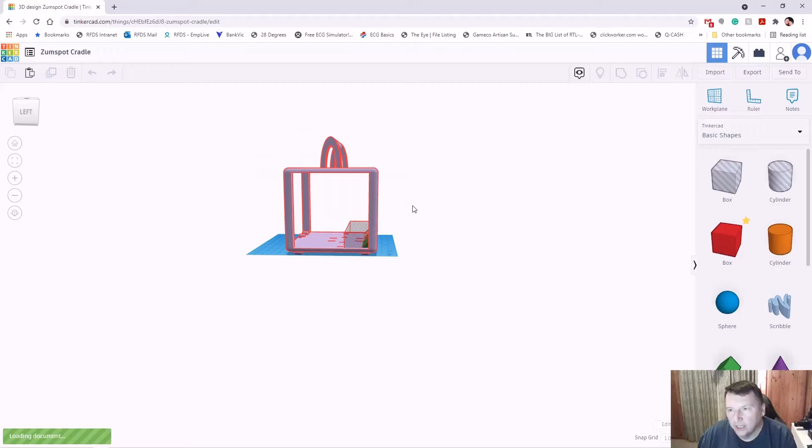So it's simple, very simple operating software. For those that don't know, there's a couple of different steps you have to take when processing a 3D print.

First step is obviously your modelling. You export that as an STL file. That then goes into another piece of software called a slicer.

There's plenty of those around. Creality, which is the brand of printer I use, have their own version of slicer, and there's a few other ones out there. I'm using one at the moment called Cura, which I'm also trialling and getting the hang of. Not sure that I like it 100% yet, but it's certainly getting there.

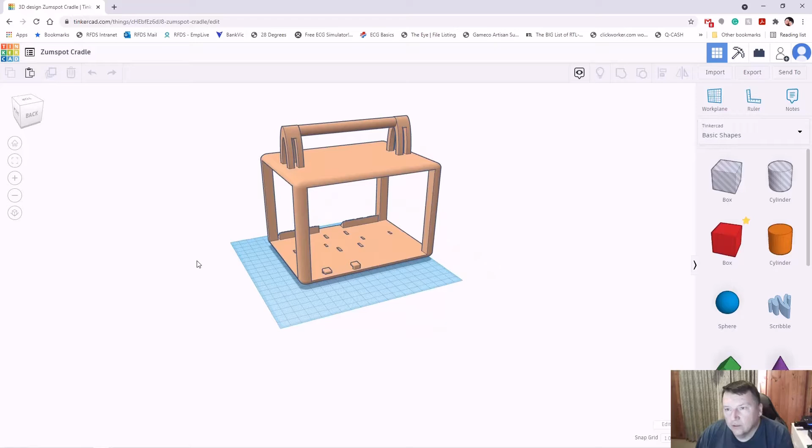So that's our 3D printer, just the general basics of the model. As I said, I'm not going to go through how I built the thing, because it took me probably, I don't know, maybe about 2 hours by the time I finished messing around with it.

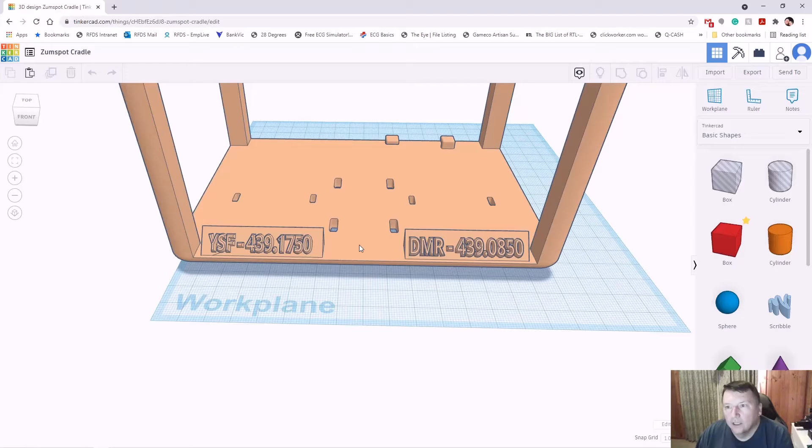And I took the option, just because I could, to get a little bit fancy and model the frequencies and the labels and everything on there. And as you can see, I've got all my slots for cable ties, which is using cable ties to secure the devices at the moment.

We might get a bit fancier in the future. Made a couple of hooks here for the 240 volt power supply cable that goes into the little USB block in the middle, which you might have noticed on the finished product.

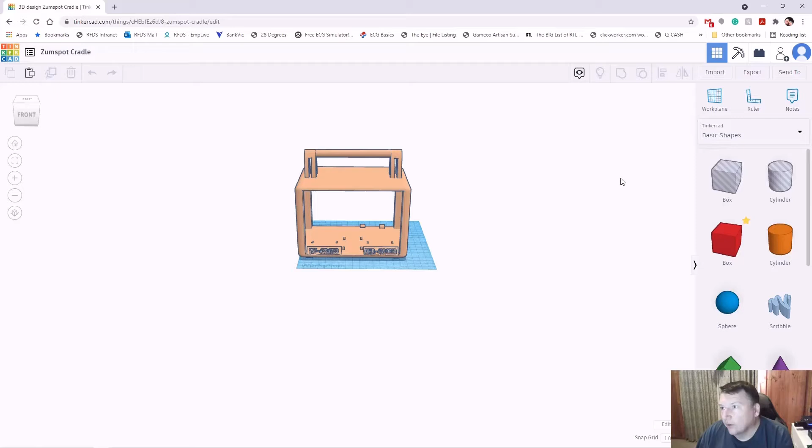So what we normally do is hit export as STL. I'm not going to do that because I've got the STL file already saved. What I do need to do though, I need to go into the file and load it.

I need to load the STL into the slicing software, which is here. So as you see, we've got two files here. We've got a G-code file, which is the file you actually put into the 3D printer, for those that don't know, and this is the STL file.

So what we'd normally do is open the STL file. Cura will automatically open for me, as that's the one I've been favouring at the moment.

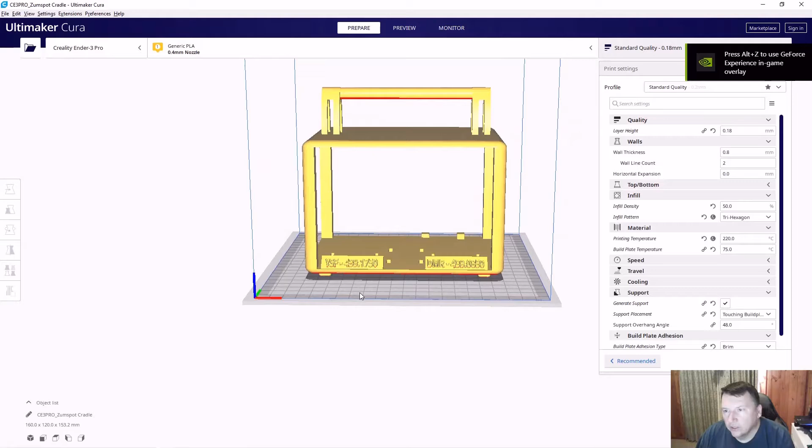And once you're in, it basically gives you your file. You zoom out to a 360-degree view of everything. Over the side here, there's a huge amount of parameters.

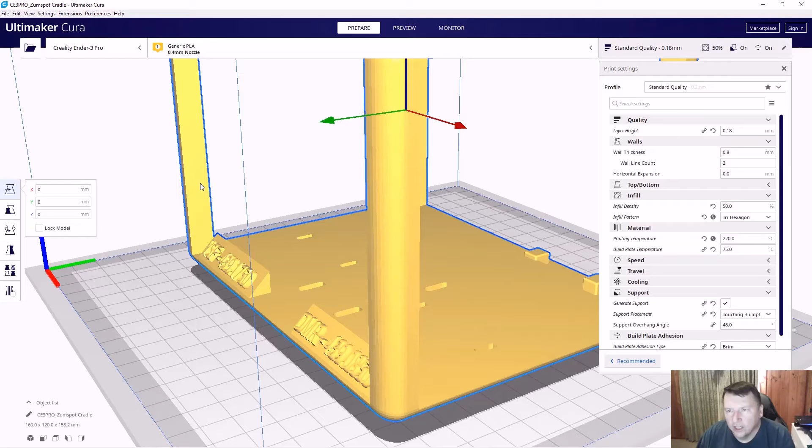Now I've already made the changes to what I want to make here to correct the problem I had. If those have seen the previous video, these upright supports here, I changed the infill density of them based on some previous models that I'd printed, and it just didn't work. The top and the base were very flimsy. They do a good job, but they're not solid like I wanted.

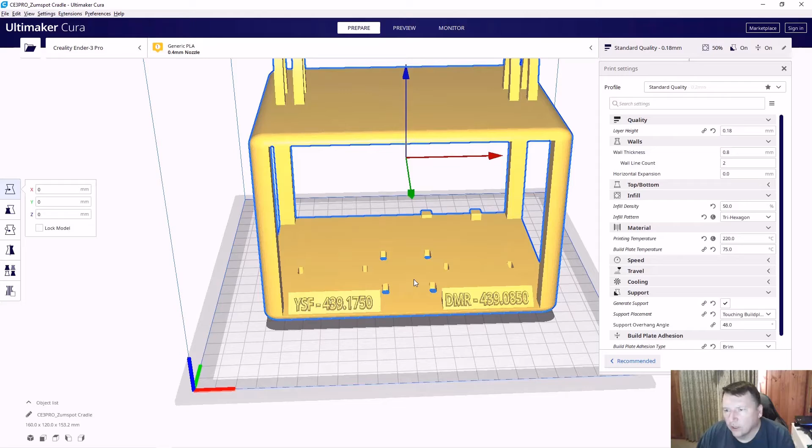And these upright supports are very hollow, where they should be reasonably well infilled and given plenty of structure and support there. One of the things I will do with this is rotate the model.

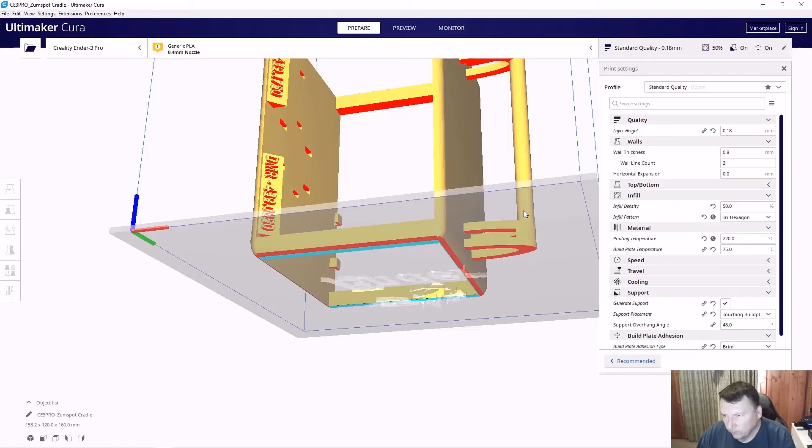I rotate the model 90 degrees to change the printing orientation. Everywhere you see that is red basically says it should have some sort of support printed in there to keep it all in situ until the plastic dries and comes off.

So that's basically it. I'd now save that, and then we'd hit the slicing program option here.

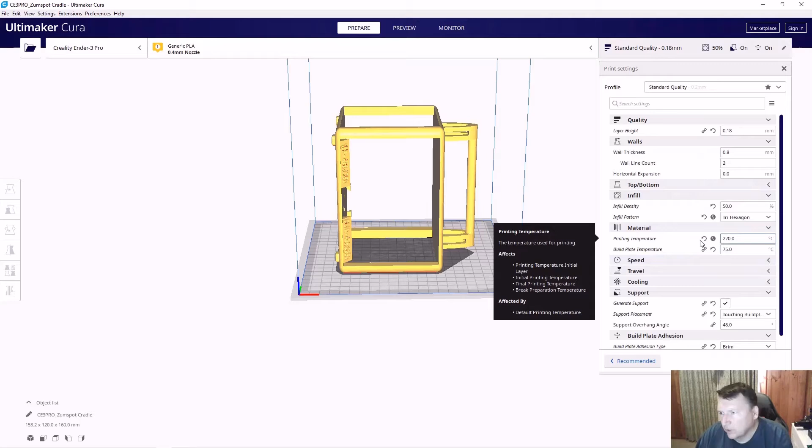So it does the calculations for you based on the specifications you've got in here, with your build temperature, your build plate temperature, the infill pattern and density, and that sort of thing, how thick the walls are. All of that stuff is changeable.

It also can make a difference to the speed, the time it takes to print, and the quality of the print, that sort of thing. As you can see, it's going to take 19 hours, 19 minutes, 120 grams, and 40 meters of printing filament.

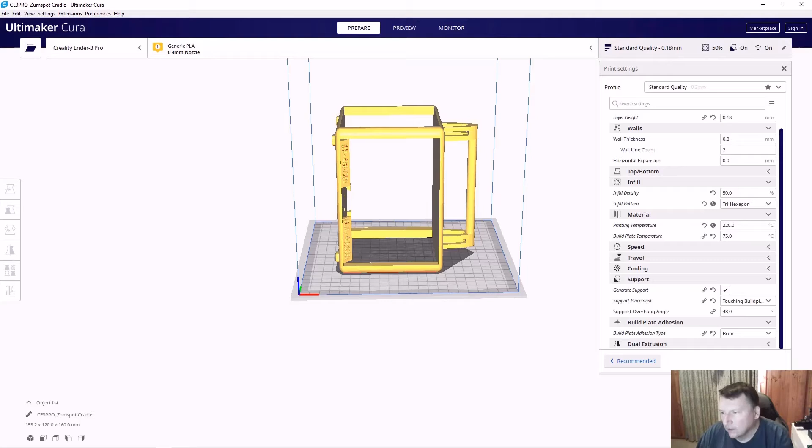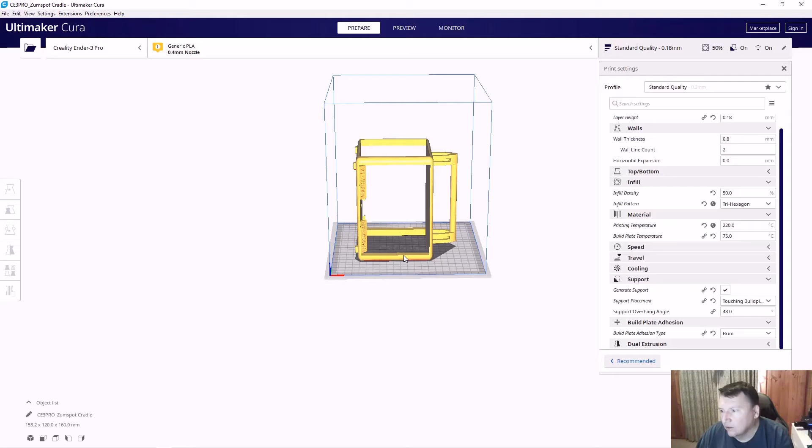Using a dark blue PLA at the moment. Normally I just save this to disk, but I don't want to overwrite the other files I've already created, so I'm just showing you here how it all works. Then I'll show you the printer as it fires up, and we'll wait about 19 hours and 20 minutes for it to finish its print run.

For those boggled by the amount of time it's going to print this thing, yeah, I was too. The one thing I've learned about 3D printing in the last few months is that any size print is a slow process. Alright, I'll show you what's happening on the printer shortly.

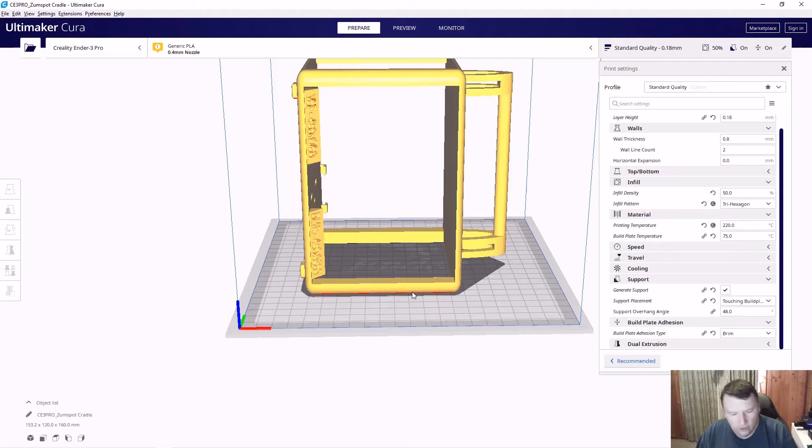Off camera I just loaded the file onto the SD card and stuck that back in the printer. Simple interface, not sure if you'll be able to read it on camera. Oh, there we go, that's not too bad. Sorry about the flickering. You basically just go down, press enter, go down to print from card, select the item you want, and off it goes.

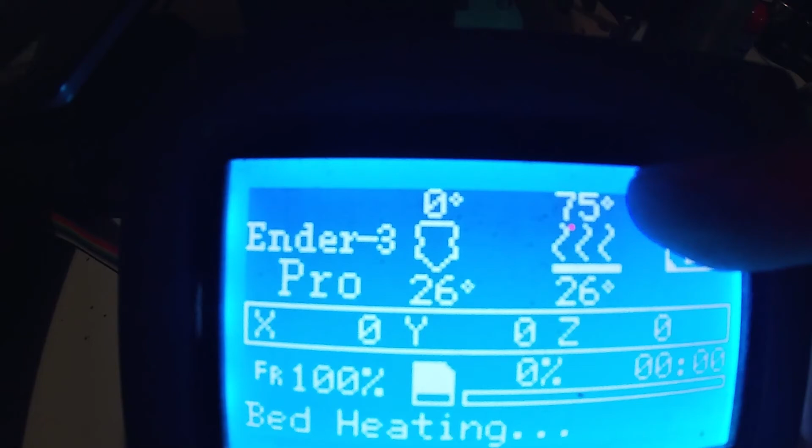At the top you see it's got a target build plate temperature of 75 degrees, and once it gets to 75 it will start printing, heating up the extruder nozzle, and then go. Probably takes about 3-4 minutes to get up to temperature, not very long, and then it will take off and start the print for us.

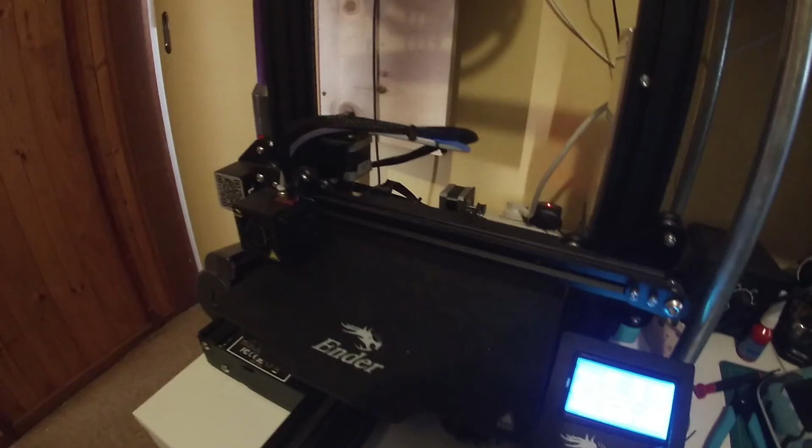As you can see, the device has come up to 220 degrees Celsius, which makes it happy for printing. It'll do a little purge of the print nozzle. I'm going to add a bit of light here because it's very hard to see in this area.

Unfortunately I'm using a dark blue PLA filament at the moment, and it's really hard to get it to show up. So if we get our lighting a bit better there - as you can see, a terribly professional video production, but that's alright, it still works. And as I said, I'm very new to any of this YouTube stuff, etc.

So it's going to lay down - I don't know if you can see that - a very thin brim around the print area, and that helps it adhere to the plate.

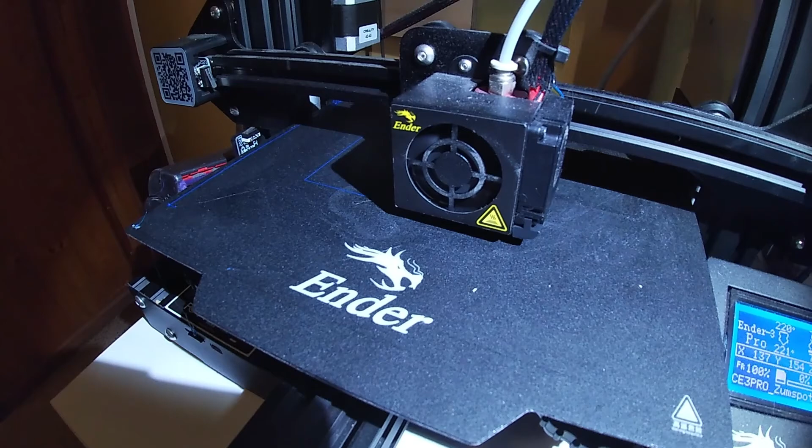I'm not going to sit here and hold the camera for the next 19 hours. I just thought I'd give everybody a bit of a look at what's going on, for those who haven't seen a 3D printer working before.

It's basically just like any CNC device, but this has got a plastic extruding head on it rather than a router, a milling machine, a plasma cutter, or whatever CNC devices people might be familiar with. This is going to run like this now for the next 19 hours and 19 minutes.

It does show us the progress on the screen there, so at the moment we're at 0%. It's taken 8 minutes for it to get up to temperature and actually get started, and it's just going to rock and roll like this.

So that's it, I'll show you the finished project eventually. Once I'm happy with it, it's my intention to give it a little light sanding. I'm using a fairly coarse build quality just to reduce the time - the finer print you make of these things, the longer they take to print, and 19 hours is already a significant print run.

After that, once I'm happy with it - it's actually done a decent print this time without me stuffing up the variables - I'll give it a bit of a paint with some car spray filler just to fill in the print lines. A bit of a paint job to highlight the text on the front where I've modelled in the frequencies for the individual Zumspots. I use one for System Fusion, one for DMR.